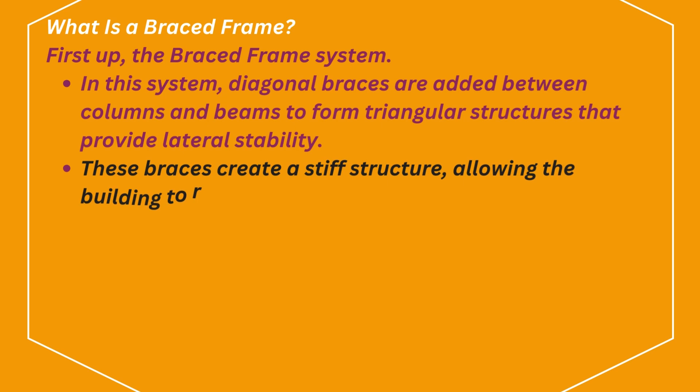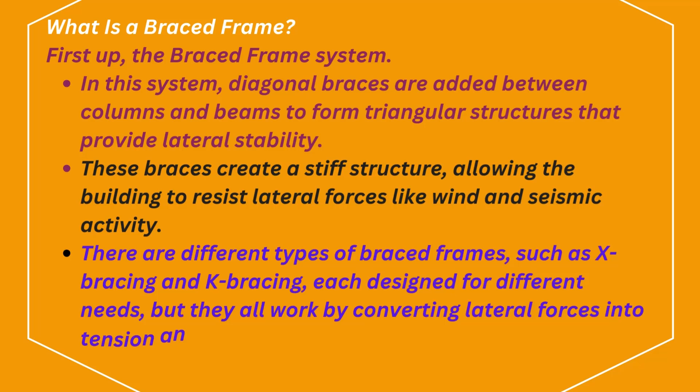What is a braced frame? In this system, diagonal braces are added between columns and beams to form triangular structures that provide lateral stability. These braces create a stiff structure, allowing the building to resist lateral forces like wind and seismic activity. There are different types of braced frames, such as X-bracing and K-bracing, each designed for different needs, but they all work by converting lateral forces into tension and compression within the braces.

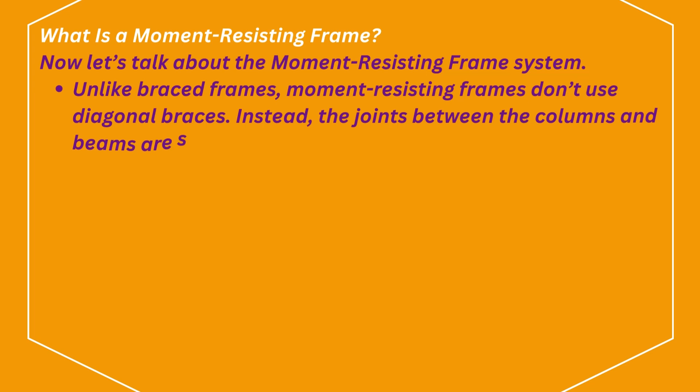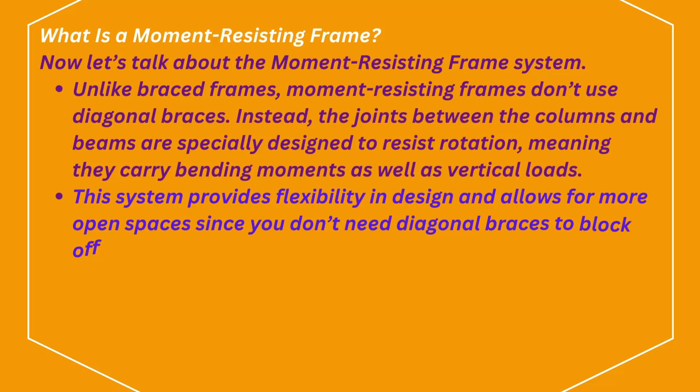What is a moment-resisting frame? Unlike braced frames, moment-resisting frames don't use diagonal braces. Instead, the joints between the columns and beams are specially designed to resist rotation, meaning they carry bending moments as well as vertical loads. This system provides flexibility in design and allows for more open spaces, since you don't need diagonal braces to block off walls or windows. However, it relies heavily on the strength of the beam-column connections to resist lateral forces.

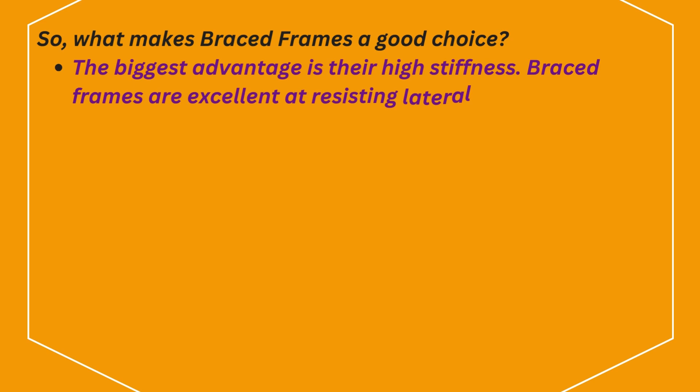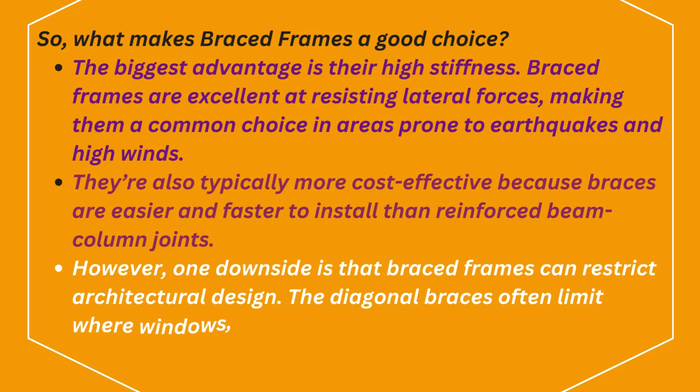So, what makes braced frames a good choice? The biggest advantage is their high stiffness. Braced frames are excellent at resisting lateral forces, making them a common choice in areas prone to earthquakes and high winds. They're also typically more cost-effective because braces are easier and faster to install than reinforced beam-column joints. However, one downside is that braced frames can restrict architectural design. The diagonal braces often limit where windows, doors, or open spaces can be placed.

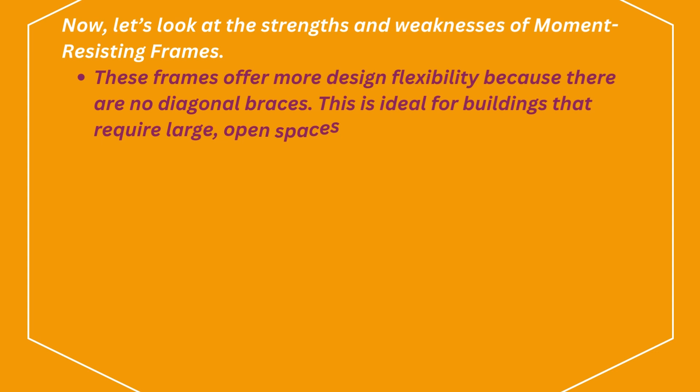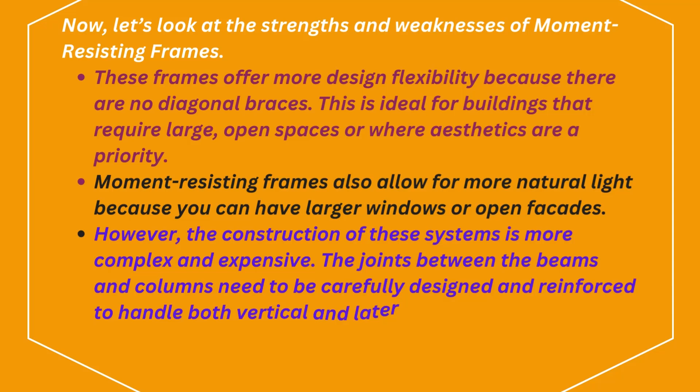Now, let's look at the strengths and weaknesses of moment-resisting frames. These frames offer more design flexibility because there are no diagonal braces. This is ideal for buildings that require large, open spaces or where aesthetics are a priority. Moment-resisting frames also allow for more natural light because you can have larger windows or open facades. However, the construction of these systems is more complex and expensive. The joints between the beams and columns need to be carefully designed and reinforced to handle both vertical and lateral loads.

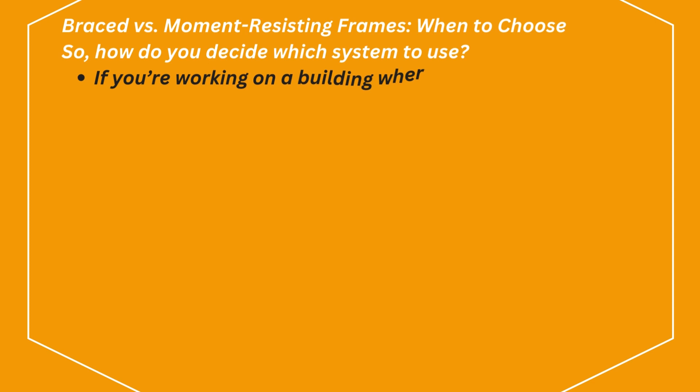Braced versus moment-resisting frames: when to choose. So, how do you decide which system to use? If you're working on a building where lateral stability is the top concern, like in earthquake-prone regions, a braced frame is often the better choice due to its stiffness and cost-effectiveness. But if your project requires flexible design and large open spaces, like in modern office buildings or high-rises, a moment-resisting frame may be worth the extra investment.

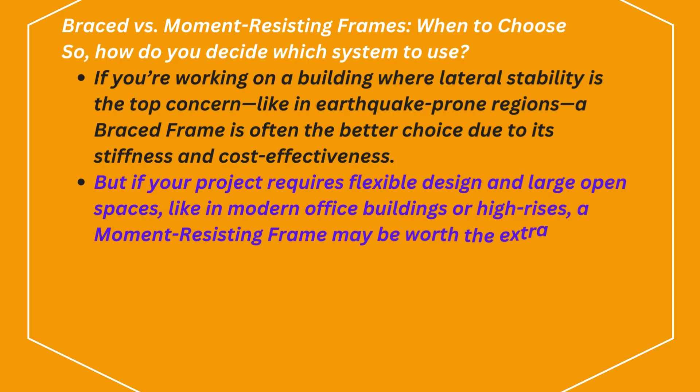In the end, both systems play a crucial role in keeping buildings safe and stable. Your choice depends on the balance between design flexibility and lateral strength.

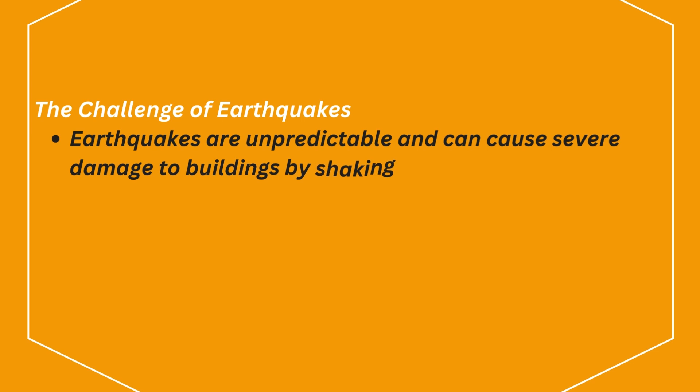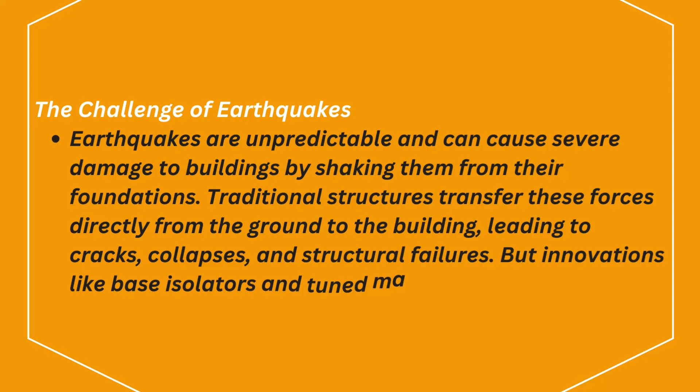The challenge of earthquakes. Earthquakes are unpredictable and can cause severe damage to buildings by shaking them from their foundations. Traditional structures transfer these forces directly from the ground to the building, leading to cracks, collapses, and structural failures. But innovations like base isolators and tuned mass dampers are revolutionizing how we build to withstand seismic events.

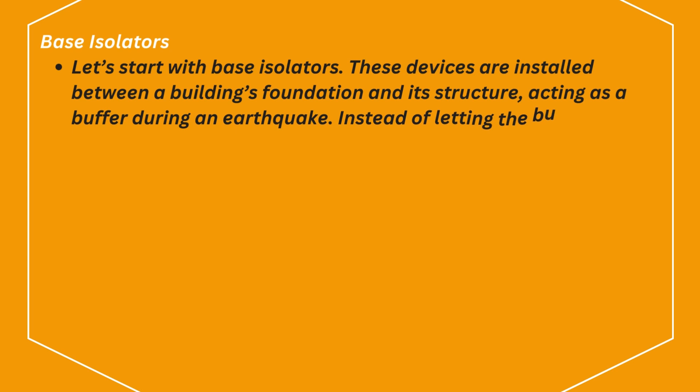Base isolators. Let's start with base isolators. These devices are installed between a building's foundation and its structure, acting as a buffer during an earthquake. Instead of letting the building move with the ground, base isolators allow the foundation to shift independently from the rest of the structure.

This reduces the amount of force transferred to the building, dramatically lowering the risk of damage. Base isolators typically consist of layers of rubber and steel with a flexible core. When seismic waves hit, the isolators absorb and spread out the energy, allowing the building above to sway gently.

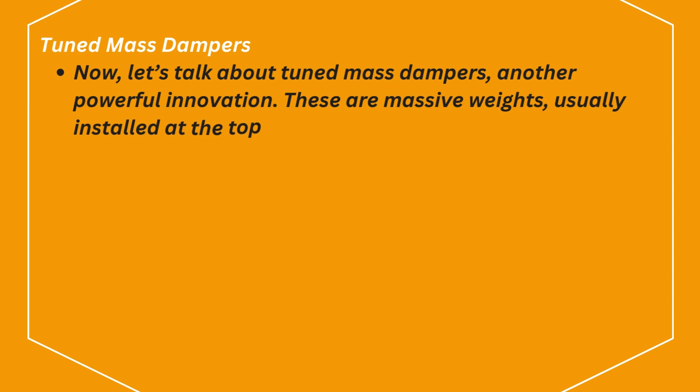Without absorbing the full impact. Now let's talk about tuned mass dampers, another powerful innovation. These are massive weights, usually installed at the top of a building, that move in opposition to seismic vibrations. When an earthquake shakes the building, the damper swings in the opposite direction, effectively canceling out much of the motion.

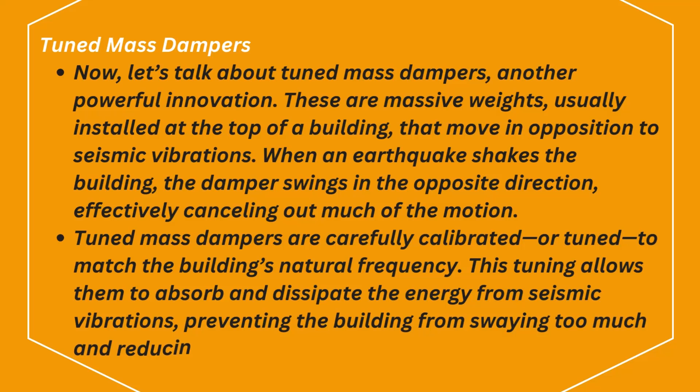Tuned mass dampers are carefully calibrated, or tuned, to match the building's natural frequency. This tuning allows them to absorb and dissipate the energy from seismic vibrations, preventing the building from swaying too much and reducing structural stress.

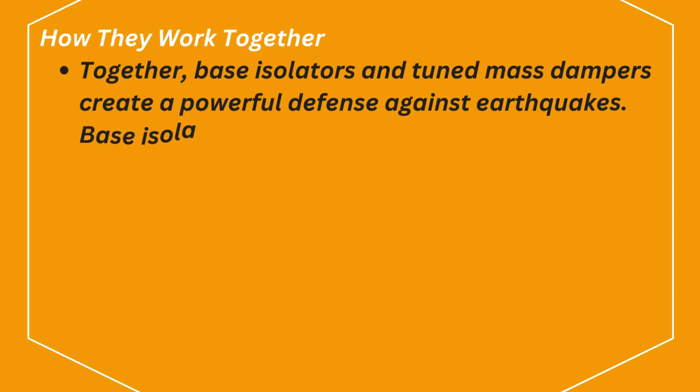Together, base isolators and tuned mass dampers create a powerful defense against earthquakes. Base isolators protect the building from ground motion, while tuned mass dampers reduce vibrations in the upper structure, making the building safer and more resilient. Innovations like these are changing the way we design buildings in earthquake-prone areas, saving lives and protecting property.

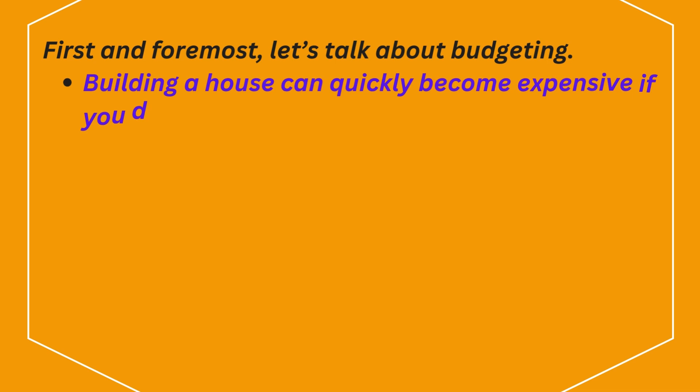First and foremost, let's talk about budgeting. Building a house can quickly become expensive if you don't have a clear plan. Make sure you include everything in your budget: construction materials, labor costs, permits, landscaping, and even unexpected expenses. It's also a good idea to set aside an additional 10 to 20% for contingencies, as surprises are common in any construction project.

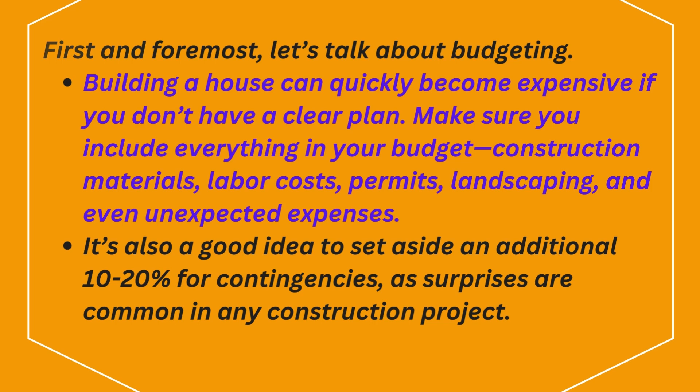Next, consider the location. The land you choose can significantly impact your design and cost. You'll want to check the zoning regulations and local building codes in the area. These will dictate what type of structures you can build, how close to the property line you can go, and what environmental considerations need to be accounted for.

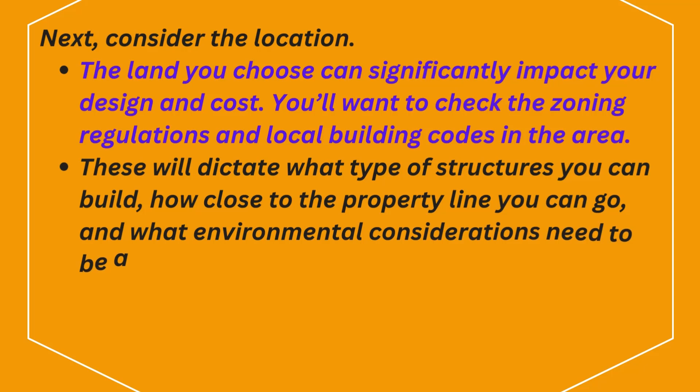Also, think about the future. Access to schools, shops, and transportation can affect long-term value.

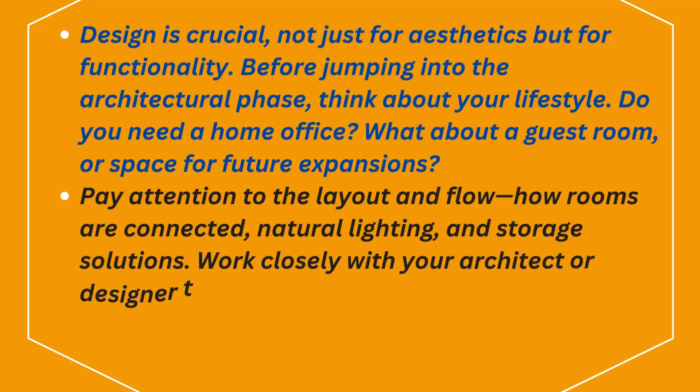Design is crucial, not just for aesthetics, but for functionality. Before jumping into the architectural phase, think about your lifestyle. Do you need a home office? What about a guest room or space for future expansions? Pay attention to the layout and flow, how rooms are connected, natural lighting, and storage solutions. Work closely with your architect or designer to ensure the home meets your present and future needs.

Building a home requires a team of professionals: architects, contractors, and engineers. Do your research and hire a licensed, experienced contractor who has a good reputation. Don't rush the process of selecting your team, and be sure to check references and past projects. A well-coordinated team can save you time, money, and headaches down the line.

Finally, set realistic expectations for your timeline. Construction projects often take longer than expected due to weather, material delays, or labor shortages. Be patient and flexible with your schedule, but also stay involved and keep communication open with your team to ensure things are moving forward. Building a house is a big undertaking, but with the right preparation, it can be a rewarding experience. Keep these tips in mind to stay on track.